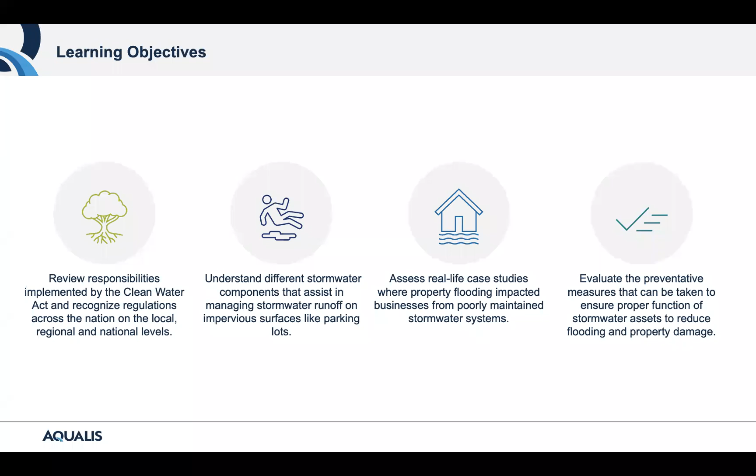And as a reminder, here are our learning objectives for today. Since Amy has already gone through these, let's go ahead and get started. So in our first section, we're going to discuss the foundation for this presentation. Why is stormwater management so important?

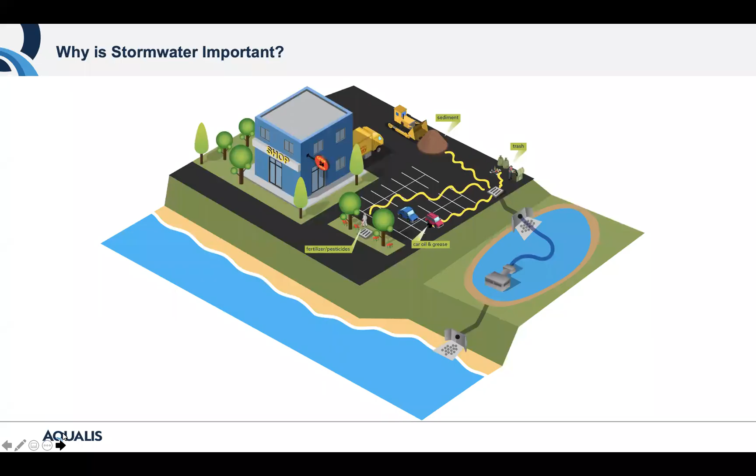When we look at this illustration, we can see the contaminants and pollution that is picked up from stormwater runoff. And when it rains or snow melts, that water is moved through impervious surfaces, which are hard surfaces that don't allow water to seep into the ground. So these are surfaces like parking lots and roadways, especially in urban development. So maintaining and managing stormwater runoff is an extreme concern due to the high surface area of developed infrastructure. And that includes materials like concrete and asphalt.

With more impervious surface, that means larger amounts of runoff that must be directed to a source to eventually flow back into the local watersheds. So all that water, or what we call stormwater runoff, is funneled through to stormwater assets to impact water quality and water quantity. And without these systems, sediment, trash, pesticides, car oil is all deposited into stormwater runoff. And that's then directed down into these stormwater assets and then slowly filtered out into local lakes and rivers, oceans, bays, any body of water.

And communities and ecosystems drink and use this water for recreational purposes. And if these systems are not designed or maintained properly, people, animals, communities can get sick. And these systems protect wetlands and aquatic ecosystems and improve the quality of receiving water bodies, protect the public health, and for our purposes today, also offer flood control.

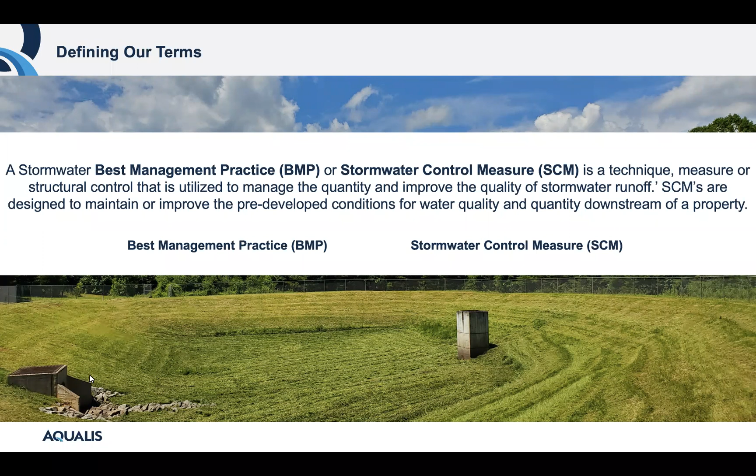In the upcoming slides, we're going to walk through the different types of assets commonly found on retail, commercial, real estate, residential, industrial, educational, healthcare, aviation, you get the point. All these types of properties utilize stormwater assets to mitigate flooding and ensure property safety, which reduces liability and ensures environmental stewardship. We're going to talk more about those requirements and responsibilities in the upcoming slides.

So when addressing stormwater control measures, we're talking about systems like bioretention gardens, or bioretention rain gardens, sand filters, constructed wetlands, wet and dry detention basins, also known as detention ponds, grass swales, permeable pavement, level spreaders, proprietary systems like filters, and all these systems make up engineered best management practices for stormwater control measures. Later we're going to dive further into the common systems that you would find on your property, but next we're going to talk about the Clean Water Act and the national regulations that drive these local and state compliance measures.

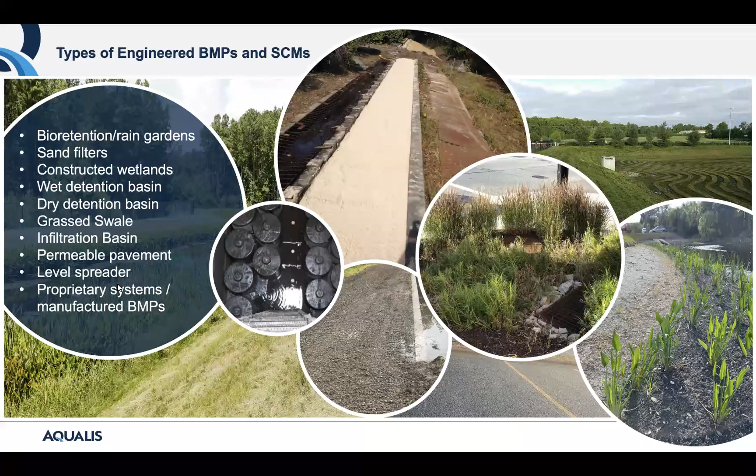So we've talked about the impacts of the Clean Water Act and how the Environmental Protection Agency regulates water, and this is just a brief history of how we got there. The Clean Water Act was initially passed in 1972 after public concern for water quality and safety after the Cuyahoga River burning in 1969, resulting in the Clean Water Act, the Great Lakes Water Quality Agreement, and the creation of the Federal Environmental Protection Agency.

The Clean Water Act serves as the basic criteria by which the EPA regulates discharges of pollutants into the water supply. The Clean Water Act has evolved over the years; before the 2000 Phase 2, the Clean Water Act previously only applied to discharges from sites of 5 acres or more. Phase 2, however, now applies to all construction activities disturbing between 1 and 5 acres.

To reduce the impact of urban runoff, the EPA requires state and municipal agencies to implement, monitor, and enforce resident stormwater management programs. These programs are designed to compel local property owners to maintain properly functioning stormwater systems. Regulations generally apply to residential and commercial properties that occupy a space equal to or greater than that 1 acre, and this includes your roof and parking lot.

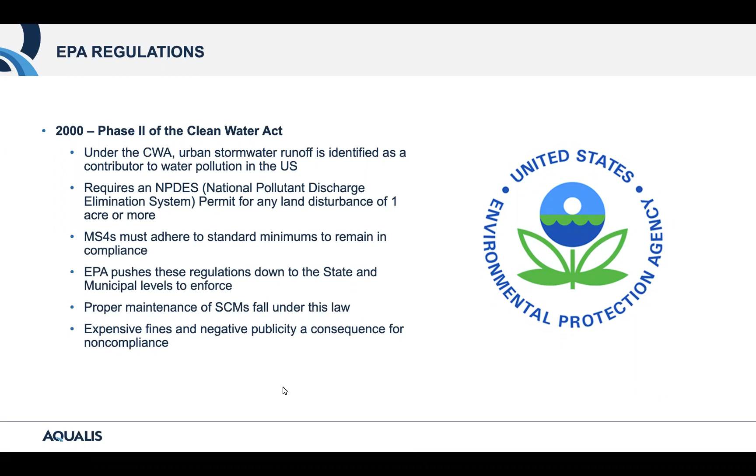Stormwater control measures help to manage water quality and water quantity of post-construction stormwater runoff. Why does water quality matter? When we go back to our original illustration, water fuels our daily lives, from consumption to recreation. We need water to live and thrive and for our ecosystems to thrive. Protecting the quality of stormwater runoff from impervious surfaces protects our future and the next generation's future.

And so what about water quantity? We can't function when our infrastructure is underwater, and systems are designed to handle 100-year storms. These systems are designed to hold and slowly filter the water out to the watershed to mitigate that flooding when properly maintained.

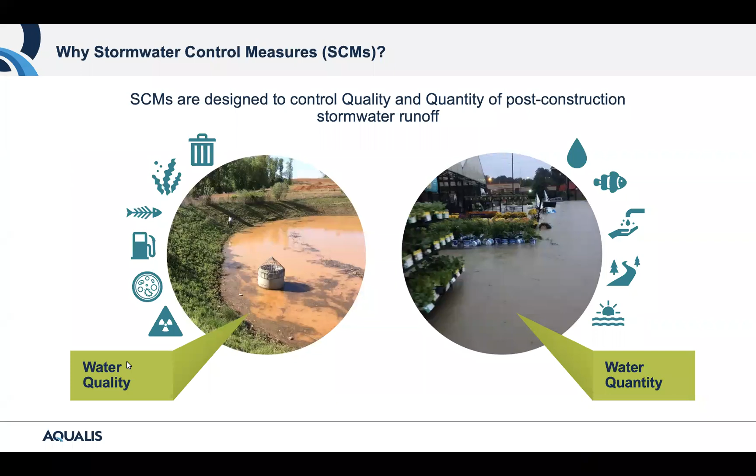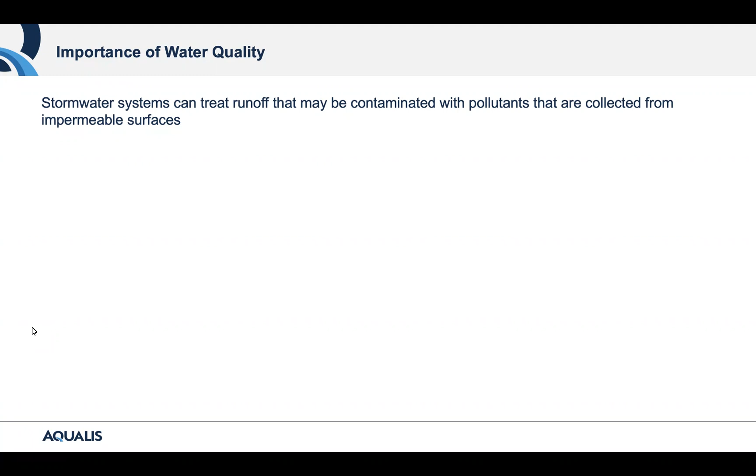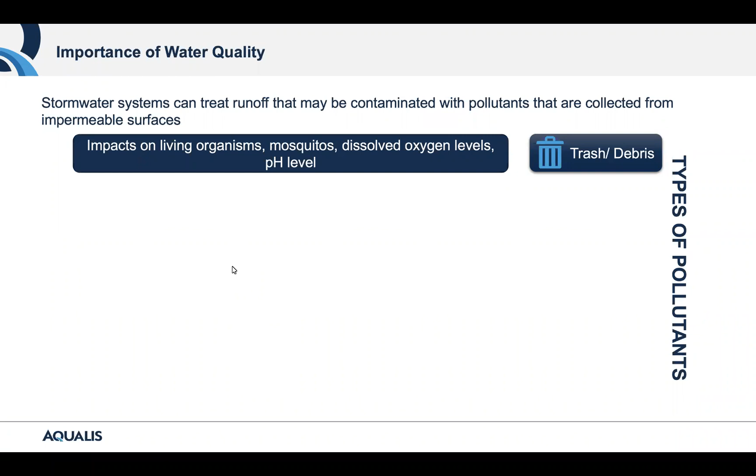So when we talk about water quality, these items greatly impact the pollutants and contaminants in stormwater runoff. Trash and debris negatively impact living organisms and are breeding grounds for mosquitoes, and organic matter decay also reduces oxygen in the water column and can change the pH levels, which negatively impacts living organisms that can be highly sensitive to any pH changes. This also includes gross solids and plant leaf matter. These are all things that we don't want to get into our water system.

Nutrients. Overloading causes excessive weed and algae growth and reduces dissolved oxygen levels in water bodies. Treatment options for algae and weeds are necessary to not only keep the system functioning as designed, but also to keep the water quality at an acceptable level. Phosphorus is commonly found in agricultural fertilizers and manure and is important to plant life, but too much in water can also lead to a reduction in dissolved oxygen in rivers and lakes.

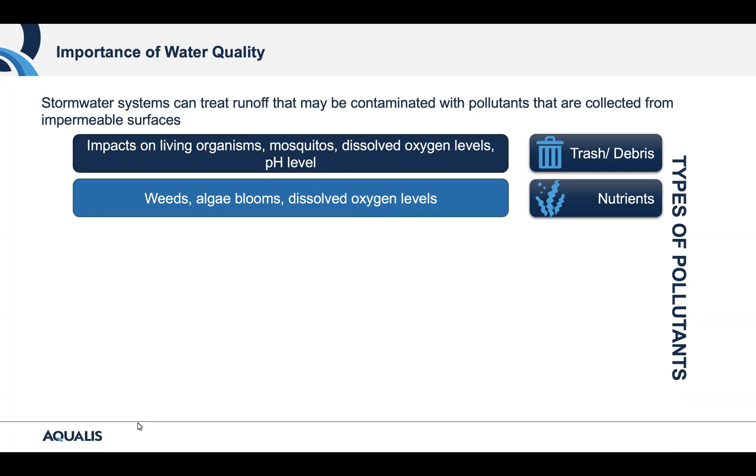And sediment. So this carries nutrients, clogs gills of fish, can suffocate stream bed organisms. It limits aquatic food supply by preventing sunlight, which then limits plant growth, and it heats the water, which decreases dissolved oxygen levels even more.

Heavy metals, so this can poison or damage processes of living organisms, and they exist in the environment for a really long time. This is motor oil, fuel, this is from vehicle wear, use and human activity. When we're thinking of a parking lot, when it rains, that runoff collects those oils and heavy metals and deposits that right into the stormwater assets, eventually reaching the local watershed.

Bacteria, so this can cause illness, comes from animal waste and sewage, all things we obviously do not want to reach our water system. Chemicals, so this is toxic to our living organisms. This includes pesticides or herbicides, sewage, paint, detergents, parking lots, loading docks, retail locations. These are common items that we find on the property.

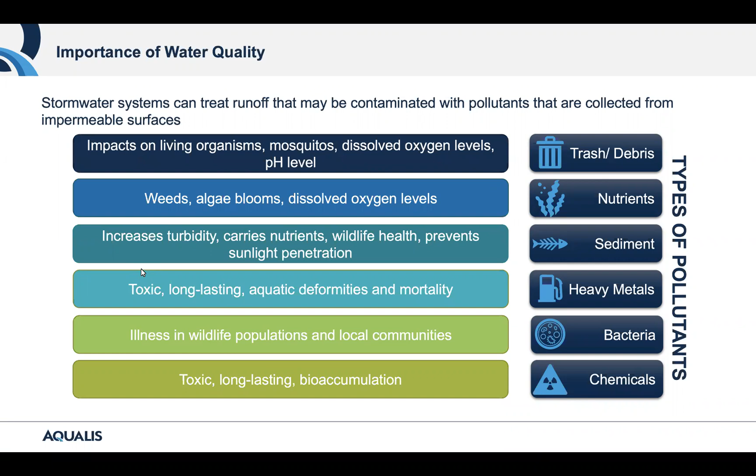We had an instance where a detention pond was very white and murky, and come to find out that there was painting occurring on the property. When it rained recently, that paint all washed into the pond. So these are all things we want to try to control when we're talking about SCMs.

So now we're talking about water quantity, and for today's purpose, really our main focus. We think of water quantity, we think of flooding, but what contributes to that flooding? It's more than just heavy rain events and localized flooding. Impacts really do span much greater than that.

So flood prevention, our main objective for today. Stormwater assets help to mitigate flooding in parking lots, private and public property, including roadways. This flooding impacts the quality of the water as well, as we just mentioned in that last slide. And when systems flood, they don't function as designed, increasing the risk of contaminated water as the system isn't slowing or filtrating and treating the water.

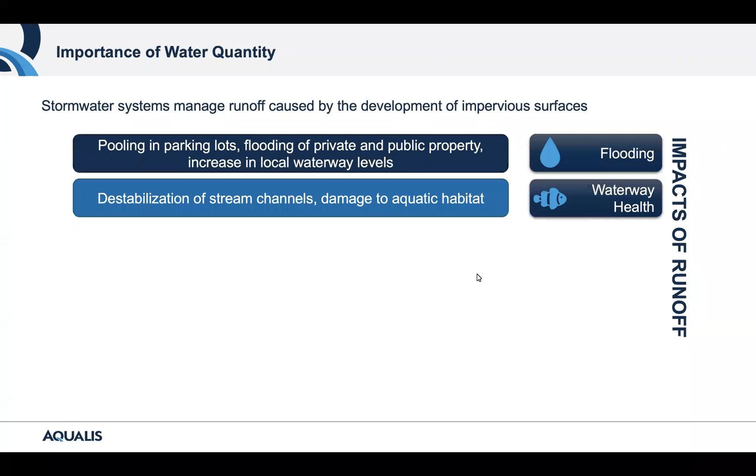Waterway health. So flooding impacts waterway health with destabilization of stream channels, damages to aquatic habitats, groundwater reduction. This prevents groundwater recharge, which is the natural infiltration of water into soils, slowly moving the water down into the water table, removing those pollutants. Large amounts of water that regions are not designed for move across the surface more quickly, reducing that chance for groundwater recharge, which helps remove those pollutants as it moves through the soil.

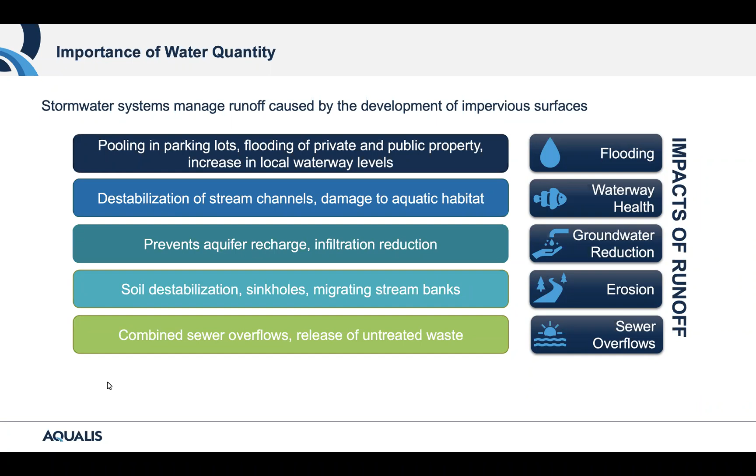Erosion, so this is flooding which leads to sinkholes, soil destabilization, which can lead to major public safety risks and also can impact stream banks. Sewer overflows, a common occurrence during flooding when backup pumps or systems fail to handle the amount of water, leading to untreated wastewater reaching local rivers and lakes that can make people and organisms sick.

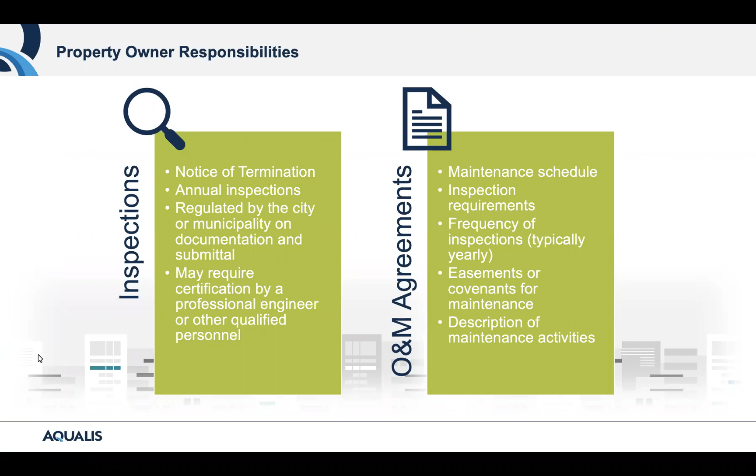Your O&M agreement is really your greatest tool in ensuring you are meeting compliance standards. This takes any mystery out of understanding what your responsibilities are for your stormwater assets. Depending on the age of your system, this can be found on file with your local municipality, or you can work with a stormwater management team to help facilitate that document and come up with a management plan that works best for you, your budget needs, and your system needs.

Notices of violation are an official notification to inform a non-compliant property owner or manager of a violation in relation to stormwater management. When inspections or O&M agreements are not being followed, a notice of violation can be issued. It's a very detailed document that includes where the deficiency was detected, and when and how it should be fixed. This may include fines and penalties, which are outlined in the NOV documentation, and typically a deadline is enforced.

And if no action or communication with the regulatory body occurs, you could be facing daily fines of hundreds of thousands of dollars each day until there's a remedy.

Most importantly, in every facet of life, ignorance of environmental laws is not an excuse for non-compliance. So even if you are unaware of your responsibility, it is necessary to take action if you receive a notice of violation. It's important to take the steps we're providing to you today to ensure that you avoid any costly fines in the future, or know how to act if you get a notice of violation.

It's worthy to note that regulatory bodies don't want to issue fines. Their responsibility is to uphold environmental standards, and they want to work with property owners in maintaining their systems to avoid fines at all costs. It's essential to respond and work with the regulatory body to let them know you have a plan in place. We manage all communications and approvals with municipalities to ensure compliance and to hopefully reduce fines. In many cases, as long as that communication is open and a plan is in place before the deadline, municipalities are willing to work with property owners and come together to make the community better.

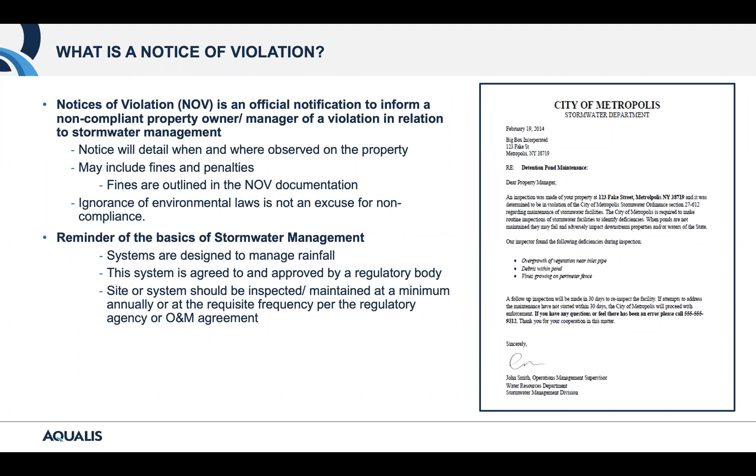So just a brief reminder of the basics of stormwater management: these systems are designed to manage rainfall. They're agreed upon and approved by a regulatory body, and they should be inspected or maintained at a minimum annually, or per that O&M agreement, like we talked about in the last slide.

So what leads to notices of violations? There are many factors and incidences that can warrant a notice of violation being issued. During construction, there are their own sets of standards, since the impacts to water quality and quantity are much different than with post-construction. This includes failure to apply for NPDES permit coverage, failure to prepare and implement a stormwater pollution prevention plan, which we refer to as a SWPPP, inadequate SWPPP or BMPs, or exceedance of permit effluent limits.

After construction, what we as an organization focus on, and our focus for today, is post-construction violations. This includes failure to implement appropriate stormwater control measures, and failure to maintain or repair SCMs. This is a big one, especially with an established O&M agreement on file that literally lays out your responsibilities. This can especially be brought to the attention of the municipality when water is pooling or flooding in your parking lot or property, so it's an easy way to identify that a system hasn't been maintained.

The failure to conduct or document inspections - many times annual inspections are required at a minimum and kept on file with that regulatory body. Illegal dumping and discharge, and illicit connection, such as connecting a sanitary sewage system into a stormwater system.

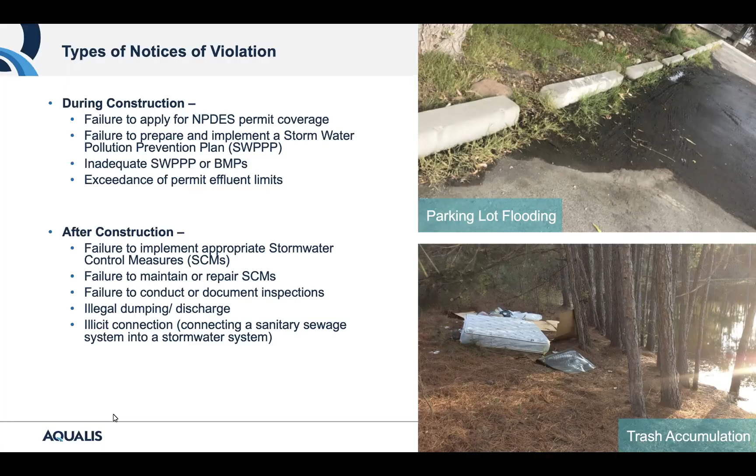So we understand the responsibilities. Let's talk about how we can mitigate flooding utilizing SCMs and what preventive maintenance protocols should be applied, and what deficiencies can end up causing flooding by each type of common SCM that you can find on a property or in a parking lot.

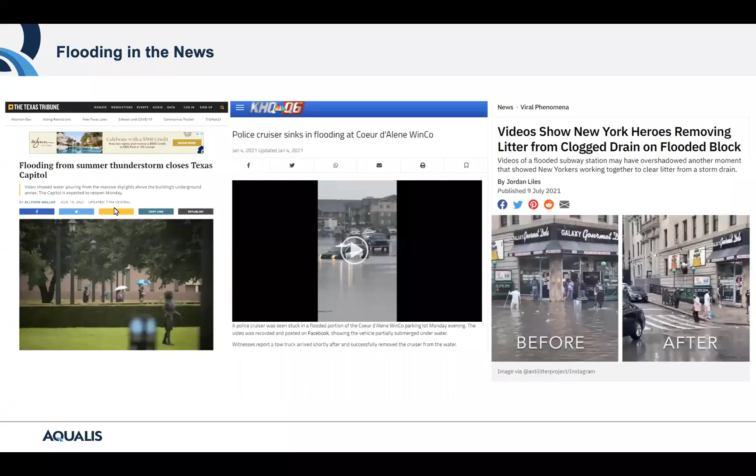So I want to highlight briefly the relevant news articles about flooding due to stormwater assets. We typically see flooding associated with these hurricanes and strong rain events, but it's important to remember that there usually is a source for why that flooding or backup occurred.

Take the flooding at the state capitol in Texas. This was due to a single clogged storm pipe causing nearly an inch of water in the wings of the capitol, shutting down the capitol for a few days.

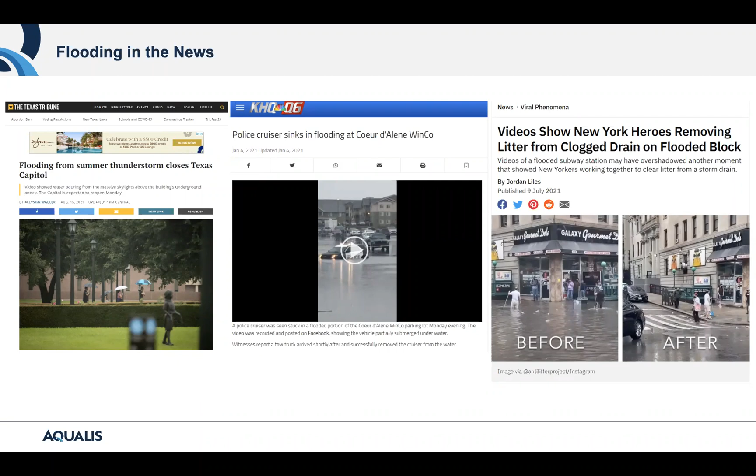The middle shows a police cruiser sinking into flooded waters at a grocery store that has a history of flooding. And the last headline is from Tropical Storm Elsa this past summer, showing a before and after of where a clogged drain caused water to pool and back up on the streets of New York due to trash.

So solutions are simple, and there's always a root cause coming back to that flooding.

Let's break down the anatomy of a parking lot when looking at the most common assets on a typical commercial or retail property. Bioswales are typically located on the border of a street or impervious surface like a parking lot. These systems are vegetated swales, aesthetically pleasing, made of layers of soil, mulch, and gravel, and can manage large amounts of runoff and slowly infiltrate it into the soil.

When larger rain events occur, a drain is designed there to carry that water through to an underground pipe that feeds out into another treatment system.

Catch basins, a very common facet of any parking lot, collect runoff to then distribute down into an underground system to feed back into the waterway.

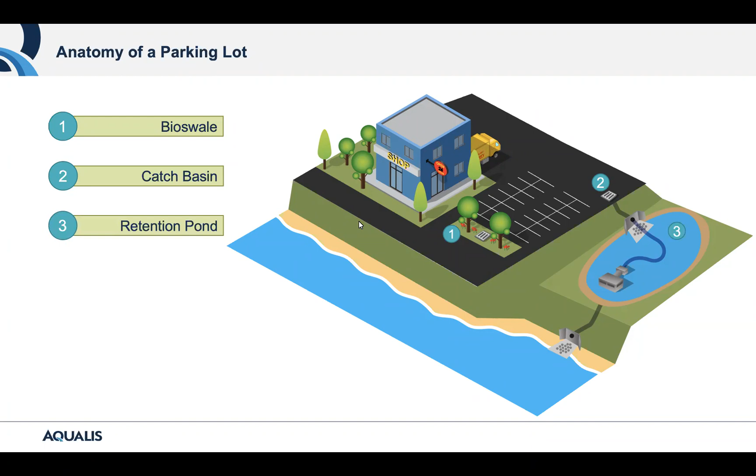Retention pond: an SCM that collects and retains water that is filtered from the bioswale, catch basin, or from loading docks.

Loading docks. This is an area particular to flooding, and we're going to talk about the systems that are commonly found on this part of a property.

Permeable pavement: this is concrete pavers or asphalt that's designed to infiltrate the water to absorb that runoff. Many of these systems work in harmony together to ensure the proper mitigation of water quantity and, of course, water quality.

If you have a backup or a clog at the inlet, the part of the illustration coming down off the parking lot, or the outlet where the water is feeding out to the community water source like a lake, river, or bay, the water will back up to the catch basin, back into the permeable pavement, into the loading dock. So understanding how that system works together can help in an emergency situation to find that root cause.

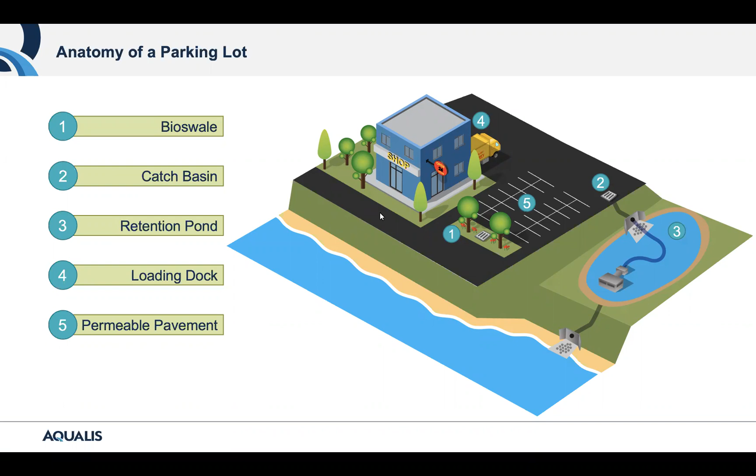Catch basins are a common solution in stormwater assets, designed to collect stormwater runoff from non-permeable surfaces, and are very effective stormwater solutions. These come in a few different designs, including drop inlets, that second photo from the bottom left; curb inlets, the middle photo; and a catch basin, the second photo from the right.

These systems take the flow of water underground through pipes, eventually to a pond or watershed. Sediment is settled to the bottom of the catch basin and is not typically meant to reach the drainage system; however, it's not designed to properly promote sediment settling as other stormwater assets like ponds are designed to.

However, as sediment and trash become accumulated, this can further cause backups and flooding to the system. These are usually found in parking lots and roadways, and normal wear and tear is expected, as these systems are the first line of stormwater defense in parking lots.

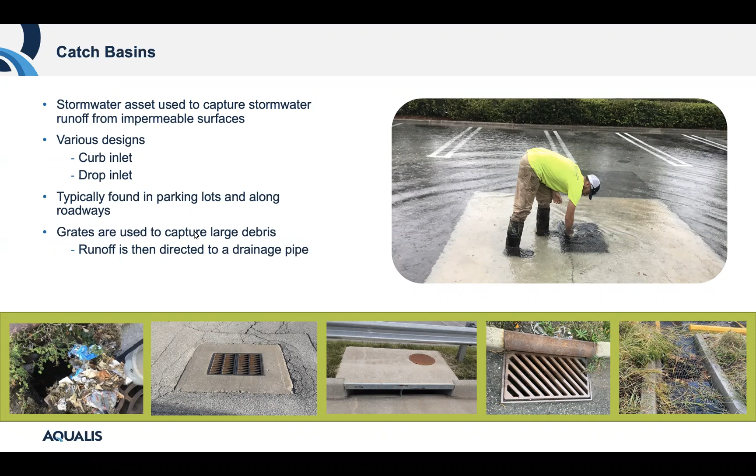So why do catch basins fail? Common deficiencies we see with catch basins include brick and mortar deterioration, found in or around the mortar of the basin. With proper management teams, we can monitor over time if deterioration requires any kind of intervention.

Sinkholes occur when water infiltrates outside of the basin through the deterioration of the mortar, causing water to pool outside and eventually cause a concave that appears above ground. These are very dangerous and need to be addressed immediately.

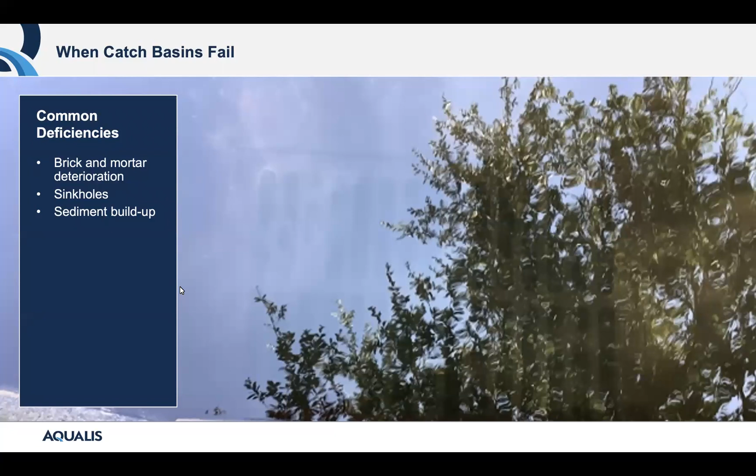Sediment buildup, sediment can collect at the bottom of the catch basin, causing further blockage and backups, ground separation and cracking around the catch basin. Specifically, we're talking deficiencies that can lead to flooding.

With catch basins in the name, they're designed to catch debris and trash, but if not regularly maintained or cleared, the catch basin will back up, or that debris will continue through the system to cause further blockages. There's nothing worse than flooding caused by trash accumulation, which is such a simple and effective preventative maintenance treatment.

Blockage further in the drain system. So looking back at our illustration, if there's a blockage, crack, or issue with the underground pipe, that water could flood back up into that catch basin.

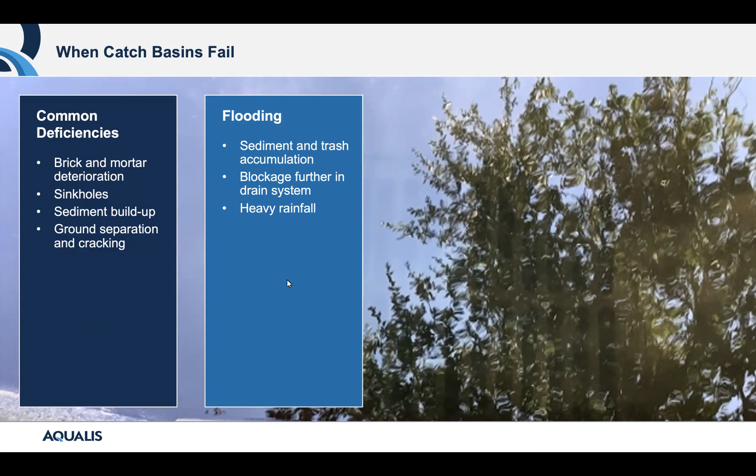Heavy rainfall, simply an overwhelming amount of rain can cause pooling, but if water's not drawn down quickly, that's when you know you have an issue. So looking into preventative maintenance steps before a heavy rainstorm can assist in assuring proper flood management.

Preventative maintenance: visual inspections, looking at the brick and mortar for deficiencies like sinkholes and completing annual inspections. Sediment measurement, using a tool dropped into the water to measure the sediment level over time, to evaluate if there's any further corrective maintenance needed.

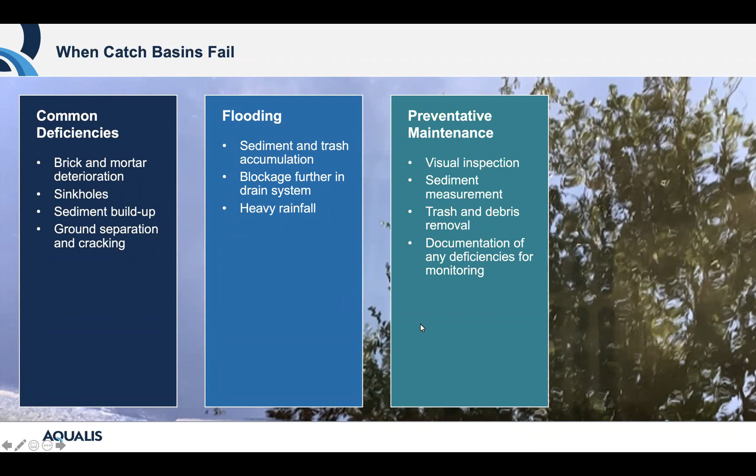Trash and debris removal, simply removing and fishing out those floatables to make sure they don't further clog the system, on a regular basis or when there is a heavy rain event approaching. Documentation of any deficiencies for monitoring, keeping a record of repairs and maintenance, especially if applicable to your O&M agreement.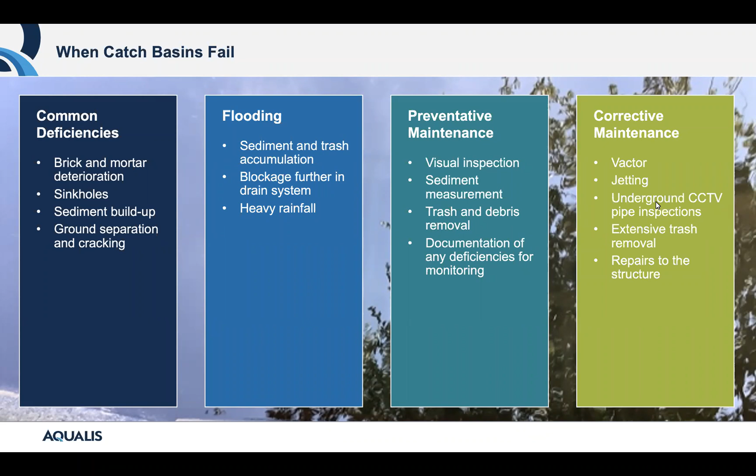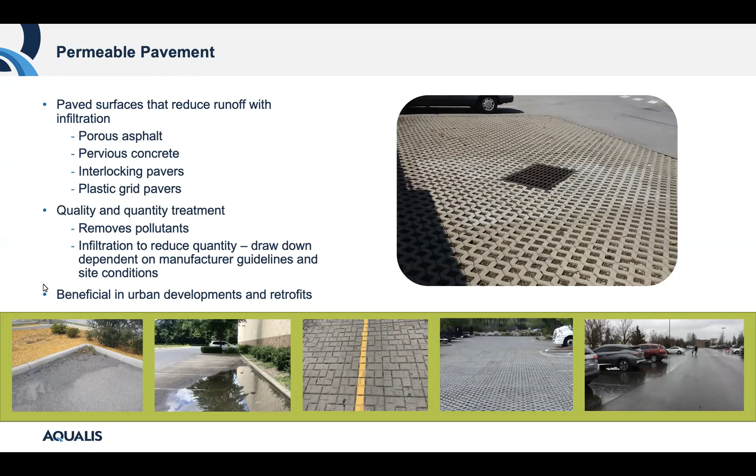But what happens when they fail? Common deficiencies include aggregate material clogging. When sediment settles into the material, this can cause a crusting that leads to flooding and inadequate infiltration, which could cause pooling in specific areas.

Plow or vehicle damage is common to these systems; blades from snow plows can damage the assets. So protective blades are needed on snow plows when cleaning these areas during winter weather.

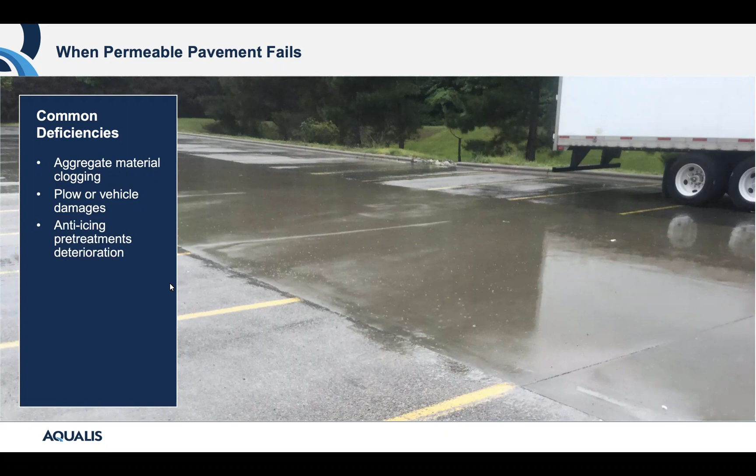Anti-icing pre-treatment deterioration: salt should never be used on permeable pavement, as this erodes the aggregate material and can also add to sediment collection.

Flooding from sediment accumulation: settling into the joints of the pavers will cause backups and flooding when proper preventive maintenance is not followed. Clogging from winter sanding can also occur, as that de-icing sediment can clog the system, block infiltration, and then the water will pool above.

Permeable pavement is not designed as an overflow from other SCMs to help infiltration. Heavy rainfall is a common factor through all of our SCMs, and with heavy rainfall and inadequate preventive maintenance, flooding is bound to happen.

Preventive maintenance includes visual inspection, which can typically be done on a routine basis to ensure that if there is aggregate material, it's still plentiful. Percolation testing is done by testing portions of the pavement and timing that drawdown, depending on the manufacturer. The timing really indicates if there's an issue.

Spot aggregate material replacement and routine industrial vacuuming uses high power vacuum to remove buildup of sediment. Maintenance documentation and recording is especially important to continue, especially if there's a warranty that includes preventive maintenance. These different assets will include a full detail of what preventative maintenance is needed for these systems.

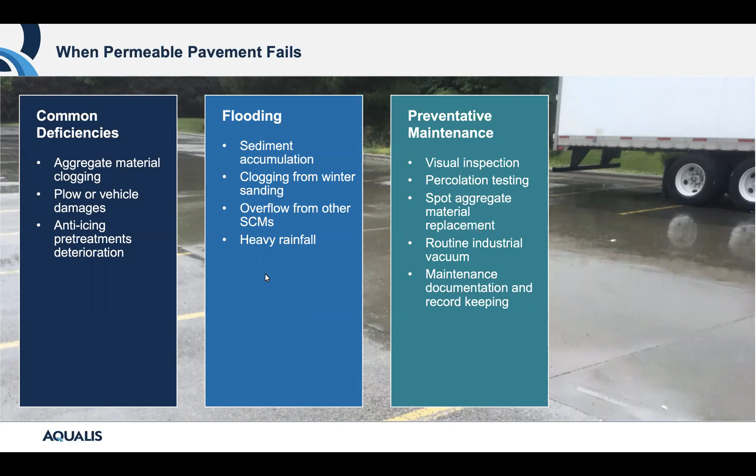Corrective maintenance is oftentimes needed to get the system back to its original function. This includes a deep cleaning with an industrial vacuum, aggregate material replacement on a large scale, and then paver replacement if damaged as well.

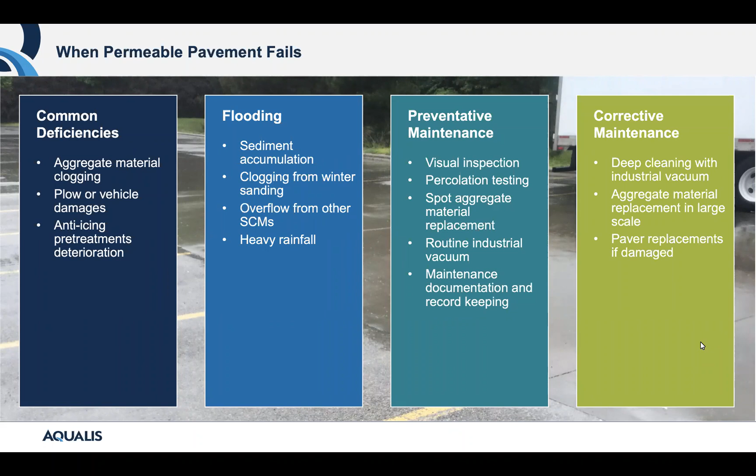A full-scale replacement is needed when the system has been neglected and corrective maintenance will not get the system back to functionality.

Retention and detention ponds are another common form of SCMs that you see on many types of properties. These systems are highly successful in treatment of water quality and quantity. Retention ponds are designed to always hold a permanent volume of water, and detention ponds are designed to hold a temporary volume of water during and immediately after rain events. Retention and detention ponds are typically found in urban and residential areas with large amounts of impervious surfaces, such as shopping centers, apartment complexes, parks, and other large paved areas.

Stormwater ponds are designed to accept and store stormwater during high water events. This increases the overall flood storage of a system and reduces damages caused by flooding by retaining stormwater long enough to reduce the peak flow downstream.

Water is diverted to a wet retention pond by a network of underground pipes connecting storm drains to the pond. The pond's natural processes then work to remove pollutants. The system allows large amounts of water to enter the pond, and the outlet then empties those controlled amounts of water to a downstream water body. Through our maintenance programs, we monitor, provide inspections, and alert property owners to any deficiencies that impact these ponds.

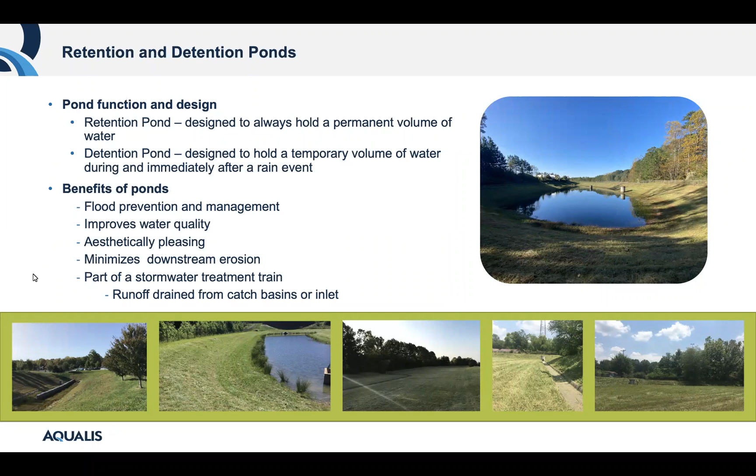Common deficiencies found in stormwater ponds include vegetation overgrowth. This is a very common sign of neglect of the system, hindering the pond from functionality, impacting slope through root systems, encouraging mosquito habitats, and is ultimately unsafe for passersby as sight lines are impacted. It's a common note for notices of violations.

Nuisance vegetation can quickly take over, impacting the natural infiltration and pollutant removal. Sinkholes are common when underground piping leading to the pond is damaged, causing that concave above the surface, revealing the sinkhole. It's so important to have these addressed immediately, as sinkholes are extremely dangerous.

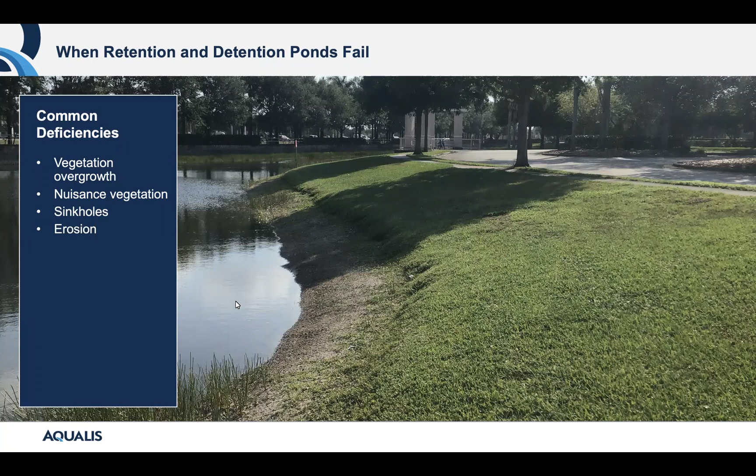Erosion can occur if water bypasses the system or the parking lot is overflowing, when water is displaced and moving over a slope rapidly. Flooding can also occur due to sediment accumulation.

In addition to mitigating flooding, another important function of stormwater ponds is to capture and trap debris and sediment. When sediment gets too high, it can impact the quality of the water and cause blockages to the outlet. Trash accumulation is also common, so some ponds even include trash racks to further decrease the accumulation of trash, collecting it at the inlet and near the outlet to help decrease trash that can clog or reach local waterways, which is really important to help prevent flooding.

Debris or clogs in the outlet structure, with trash and sediment as contributing factors. Failure to maintain structures occurs when ponds are neglected, causing water levels to rise past the design levels, which can result in notices of violation and flooding. Collapsed pipes in the underground structures feeding into the ponds can cause backups, whether in the pond or back into the treatment train, such as the catch basin or bioswale.

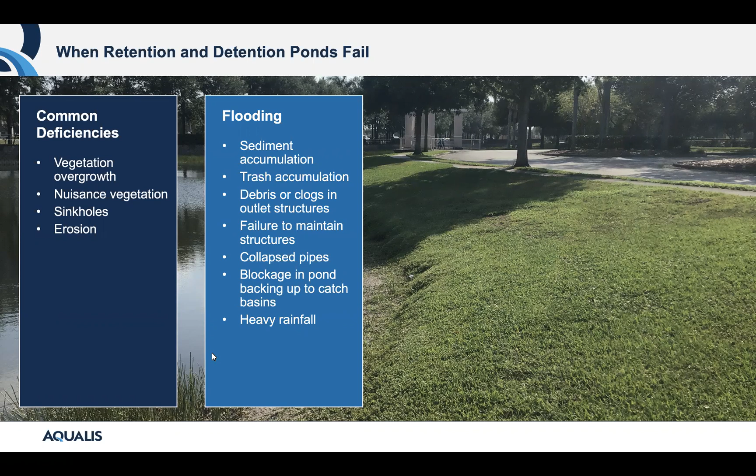Heavy rainfall can cause drawdown to not occur at the rate it's supposed to, so it's important to watch that drawdown, especially after big rain events.

Preventative maintenance includes vegetation management. We just talked about how that vegetation can get out of hand quickly, so routine mowing, trimming, and removal of nuisance vegetation is really important here.

Monitoring sediment in the forebay or basin, removing trash and debris, monitoring water levels after rainstorms for proper drainage, and assessing animal activity. Beavers really love to make homes in these ponds, and they create dams that can cause flooding and backups, prohibiting the function of the pond's design.

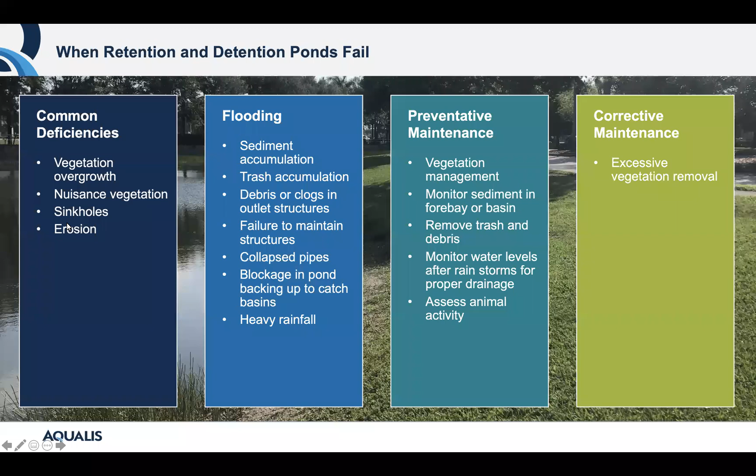Corrective maintenance includes excessive vegetation removal, slope stability work to reduce or repair erosion, and addressing clogged or damaged pipes. Sometimes extensive repairs are needed if major excavation is required. CCTV underground inspections are a cost-efficient way to find root causes and treat the issue at the source.

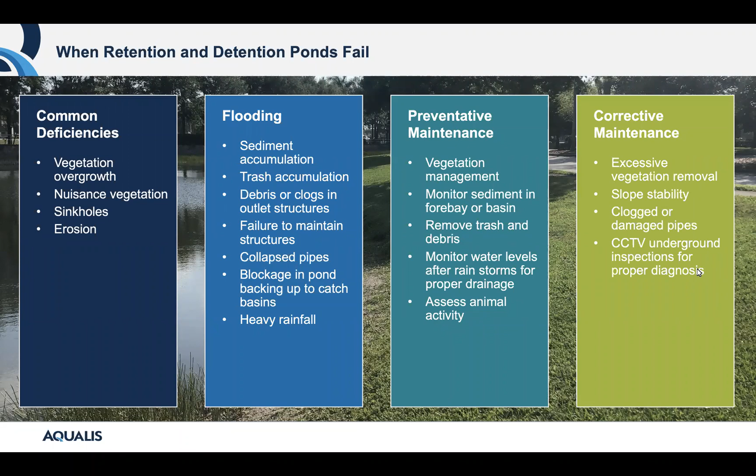Swales and bioswales: bioswales and grass swales are SCMs full of vegetation or grass that border impervious surfaces. As you can see in these pictures, they're almost always located near parking lots, and they utilize infiltration to reduce flooding and collect pollutants. Like rain gardens, these systems consist of layers of materials to help water infiltrate into the soils, and with peak water levels, divert into an underground pipe.

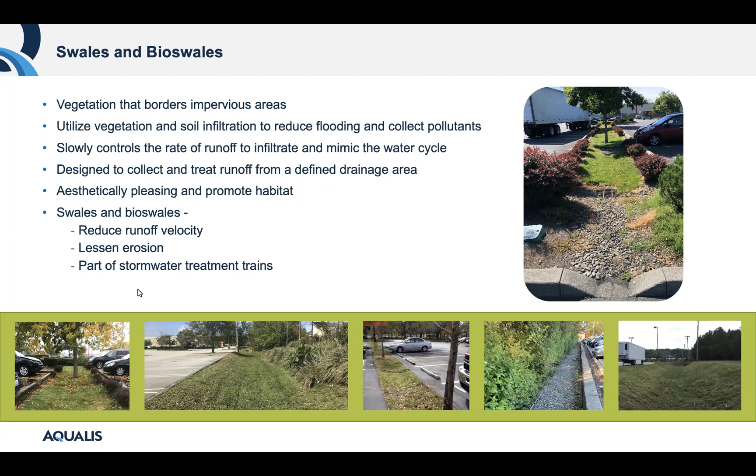These systems are linear in nature and function as an open channel to convey stormwater runoff. They're designed to mitigate a portion of stormwater runoff and are a very aesthetically pleasing addition to roadways and parking lots. They also assist in reducing runoff velocity to capture large particles and pollutants during rain events, and help lessen erosion in the areas they're designed for. They're typically part of a stormwater treatment train, as they are one of multiple SCM systems on a property.

What happens when they fail? Common deficiencies include vegetation overgrowth—you'll see it over and over again—to the point where the vegetation is too overgrown to properly manage stormwater as designed. Nuisance vegetation, like with stormwater ponds, can grow in thick patches here too, hindering water from flowing freely or as designed. Erosion can occur if water isn't directed or the system isn't maintained as designed, bypassing through an area that's not part of the stormwater asset.

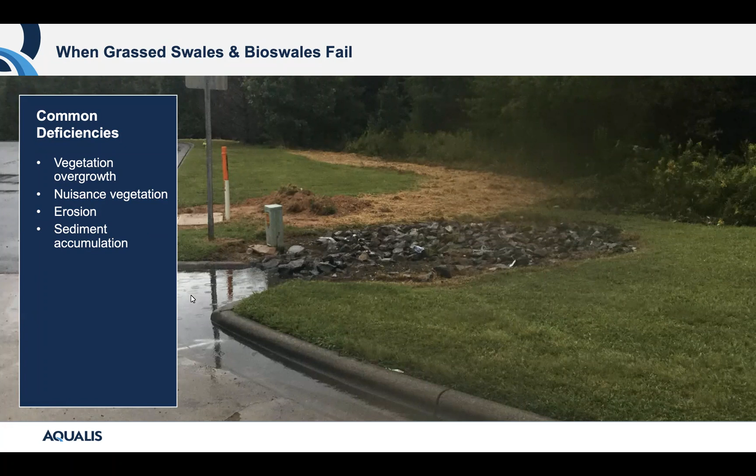Sediment accumulation builds up in the system over time, impeding infiltration and eventually causing a slow drawdown and flooding of the bioswale. Flooding often traces back to improper maintenance. Trash and sediment accumulation, if not properly maintained, can build up and hinder runoff from ever reaching the soil it's meant to infiltrate.

These systems are designed with layers of compact soil, loose mulch, and gravel, all of which must be maintained to function properly as designed. If the vegetation fails or dies, it no longer assists in reducing velocity, ultimately overwhelming the swale and causing flooding, as well as providing no pollutant uptake.

Backups from the SCM treatment train occur since these systems capture some runoff on properties—when other SCMs fail, it can overwhelm the bioswale. Heavy rainfall, continuous rain, and high velocity can all contribute to flooding if the swale isn't properly maintained. Swales and bioswales will slowly degrade naturally due to their design, as water at high velocity drains, causing vegetation and soil to deteriorate and decreasing infiltration effectiveness. Extreme rain or flooding can exacerbate soil degradation and vegetation failure, which then increases flooding. Clogging results from that sediment and debris.

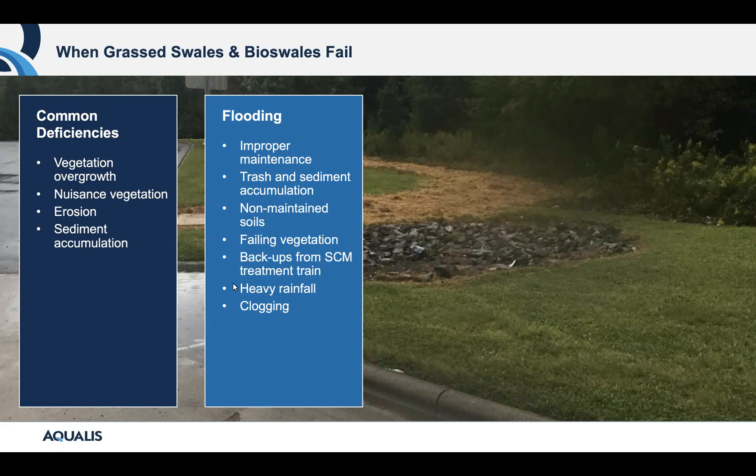Preventive maintenance: vegetation management is so important here. Reseeding or replanting is needed to encourage proper growth and avoid vegetation failure. Soil inspection ensures proper compaction and infiltration testing. Monitor water levels after rainstorms—especially for newly constructed systems, analyzing these systems during or just after a rainstorm is really important to make sure they're functioning as designed.

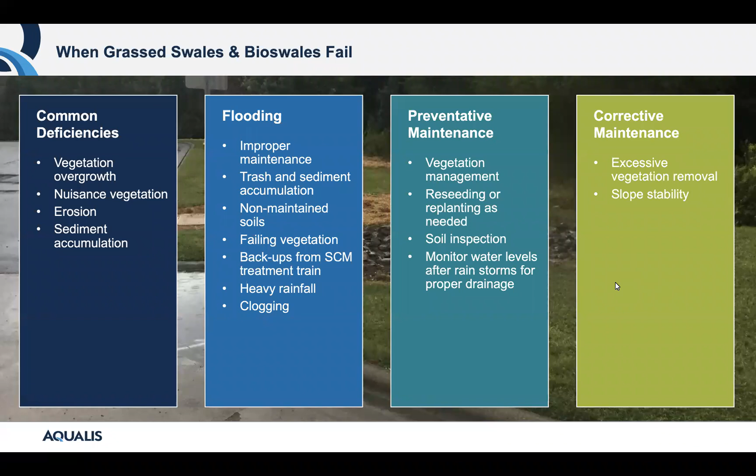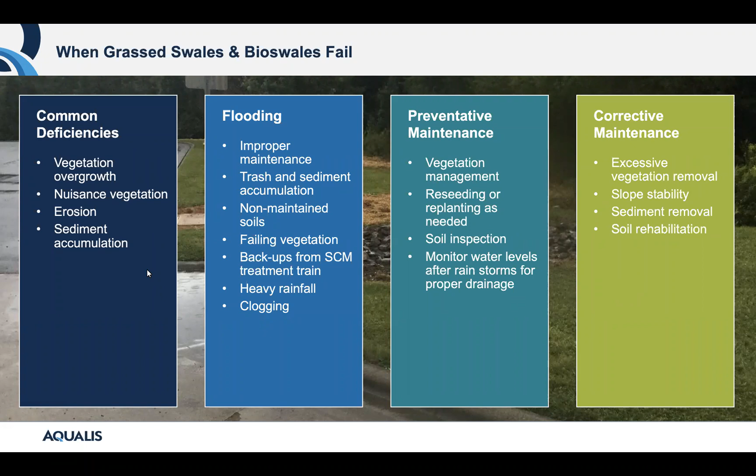Corrective maintenance includes excessive vegetation removal and slope stability work—if there's slope failure, this impacts the velocity at which runoff reaches the system, causing additional sediment to infiltrate and leading to early failure. Sediment removal: heavy sediment is visual and suspected, and can be excavated from the system and disposed of. Soil rehabilitation may require a full rehabilitation to restore the soils to their original design and regain infiltration and removal capacity.

So underground systems. Engineered underground SCMs offer flood control, reduced erosion, and groundwater recharge. By slowly moving stormwater runoff from areas with densely impervious surfaces, this solution can slowly reintroduce water to the watershed. Large pipe systems help slow down and hold stormwater runoff, commonly paired with proprietary devices so that water quality can also be treated.

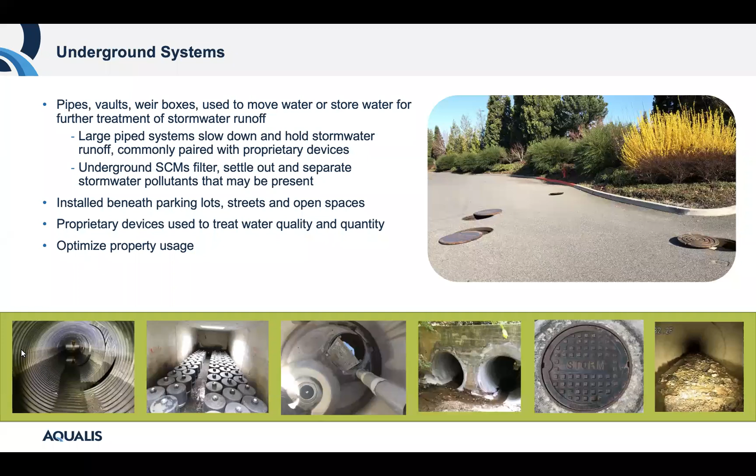Underground assets assist in the removal of hydrocarbons, phosphorus, and other heavy metals when coupled with proprietary devices. These are typically installed in parking lots, streets, and open spaces, and provide additional public safety as well. Proprietary devices are used in conjunction with underground SCMs in the form of filters or cartridges to further remove pollutants through different kinds of systems. And underground systems maximize the space below ground to minimize the impacts to land above ground.

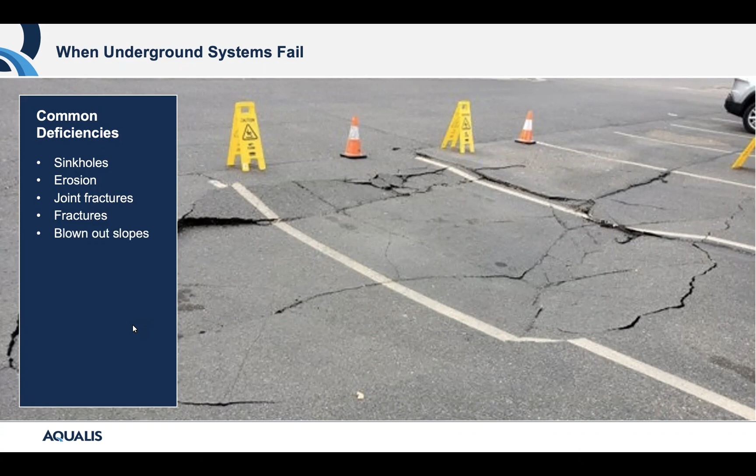When we're looking at flooding, this includes, again, improper maintenance, including failures to complete visual or annual inspections. Clogged drains: debris, trash, and sediment all settle and clog these systems, which then back up into catch basins and onto your property. Water bypass, when that water detours from the design. Damaged pipes, so similar to the above, water's not reaching or moving through its intended path, backing up to cause above ground flooding. Sediment accumulation, trash and debris blockages, all leading to flooding.

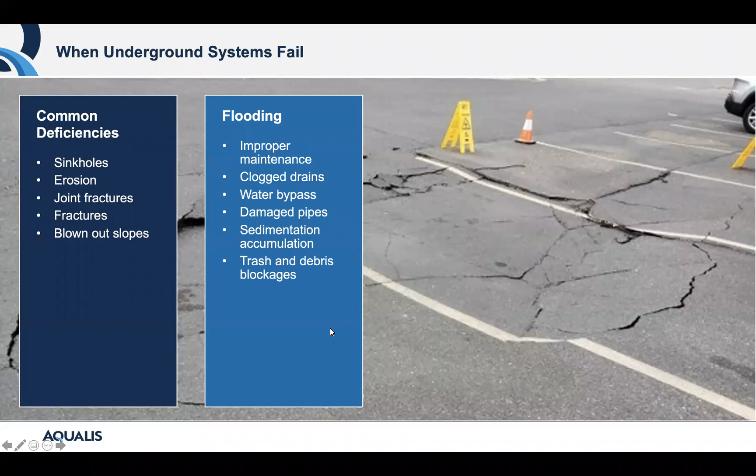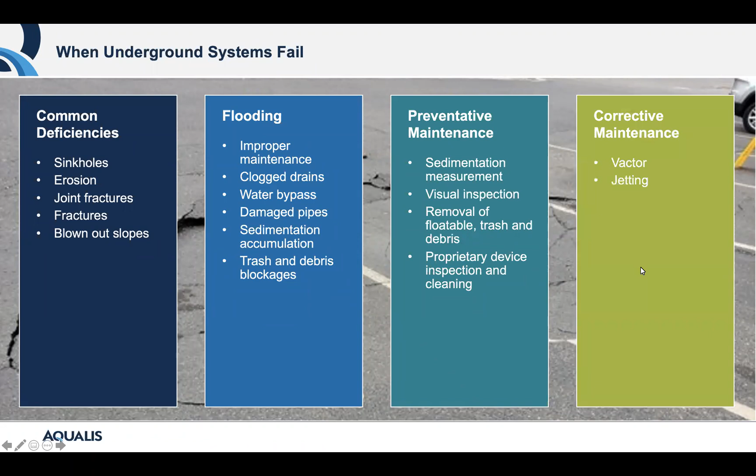So preventive maintenance, what can you do to mitigate that flooding? Sediment measurements, using a proprietary measuring tool to monitor sediment over time in the system, visual inspections, removal of floatable trash and debris, proprietary device inspection and cleaning, and corrective maintenance. So vactor, jetting, CCTV underground pipe inspections, proprietary filter replacements. These can all vary in types, sizes, and quantities as well, so working with a stormwater management team that understands those filters is really important.

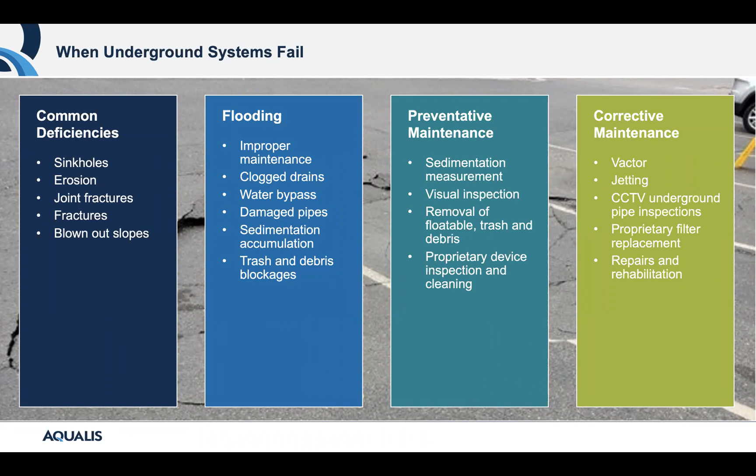Repairs and rehabilitation. Repairs to underground systems are usually costly and extensive. With aging infrastructure, many systems installed 30 years ago are now reaching the end of their life cycle. So utilizing CCTV underground inspections can assist in evaluating the health of the system in order to budget appropriately for repairs and replacement.

Sump pumps are also located in this area to help move water where gravity is unable to move it down through the underground system. These pumps can fail due to lack of maintenance and neglect, causing further flooding. And catch basins are used in this area to move the water to underground systems by catching debris and trash. These systems, purely due to the location, are under constant wear and tear from debris like broken pieces of pallets, spilled materials, and trash.

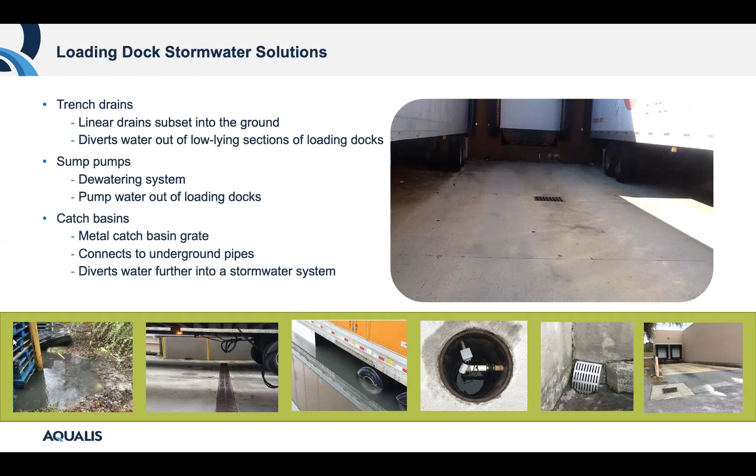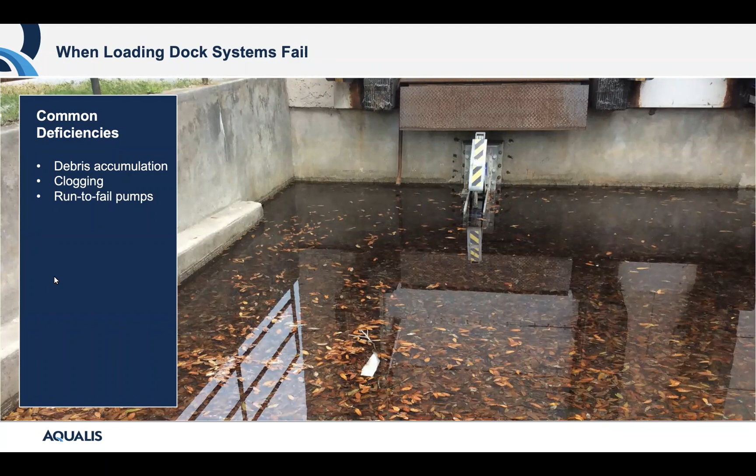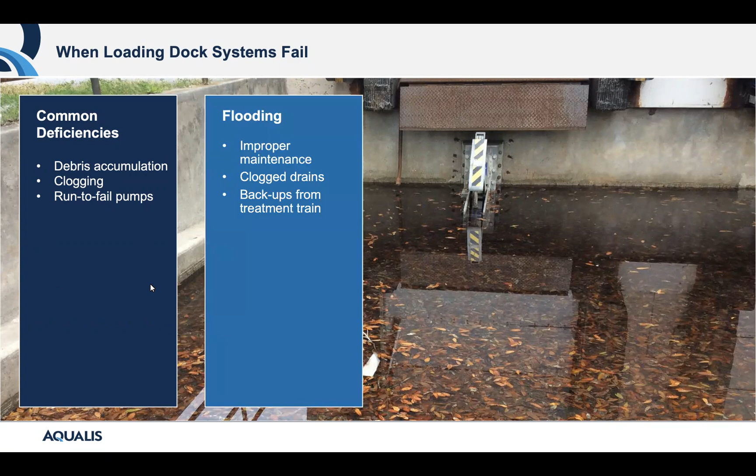When loading docks fail, this includes debris accumulation and clogging: sediment buildup and trash can clog the pump, the trench drains, and catch basins. Run-to-fail pumps, which is very common with pumps. Flooding, from improper maintenance or neglect of the system. These areas require frequent visits to ensure systems are functioning as designed, especially in locations that rely on deliveries. Clogged drains, backups from that treatment train that we talked about, debris and trash buildup.

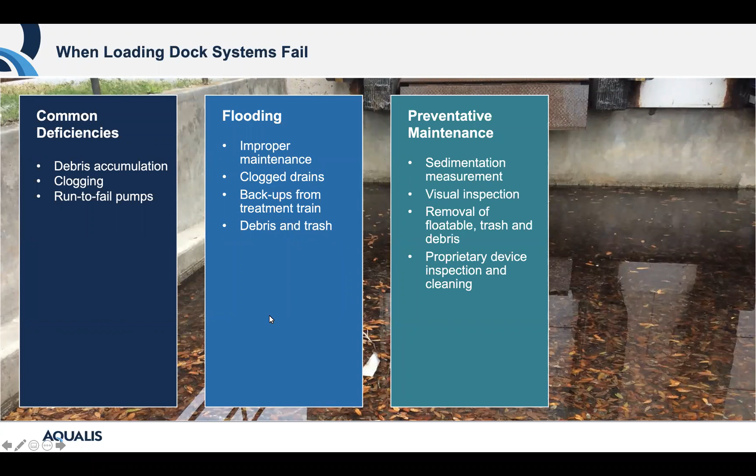So preventive maintenance. This is sedimentation measurements, visual inspections, especially during rain events, ensuring that the water is moving where it needs to be and that drawdown is happening correctly as well. Removal of floatable trash and debris, proprietary device inspection and cleaning, corrective maintenance. So we're looking at vactor, jetting, CCTV underground pipe inspections, filter replacements, and repairs and rehabilitation. This includes pumps as well. Full replacement of pumps may be required if they are not maintained and require frequent emergency visits.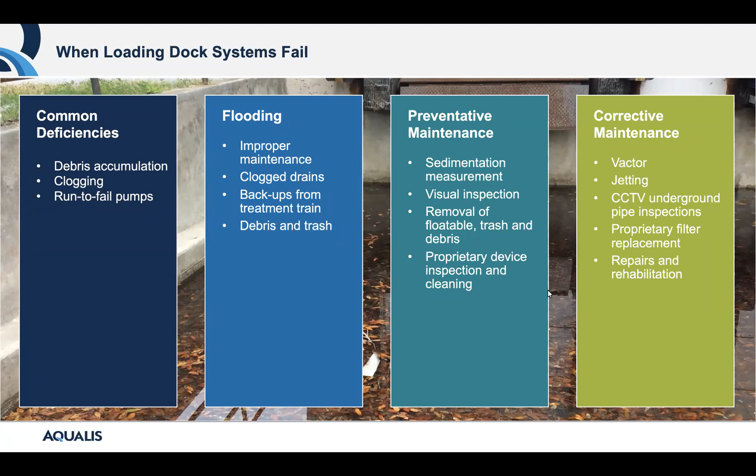The run to fail method. So I mentioned this briefly. Run to fail is a common practice with these systems. So they're typically tucked behind buildings, hidden parking lots, vegetated. So if you're unaware of what a bioswale is, you would think it was there to be designed as an aesthetic part of a parking lot. It's actually a system that requires maintenance.

So we find that this is due to lack of awareness of these systems, poorly maintained due to turnover in positions, unaware of property use O&M agreements, deficient knowledge of regulations. Sometimes there's budgetary restrictions, can be typical, especially with systems that require extensive restorations. Lacking proper budget allocation to maintenance.

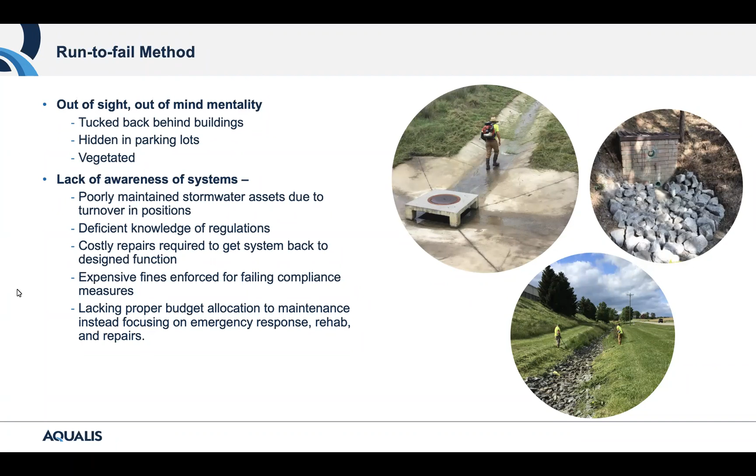So we can't emphasize this enough. With proper preventative maintenance, you can save on costly emergency visits that only treat the issue, not ensure the system is brought back to proper design and function.

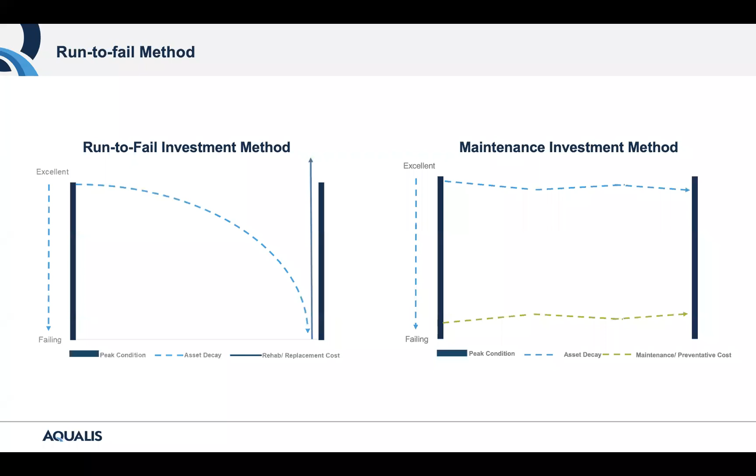So we love to use this graph. As depicted, you can invest in your system through preventative maintenance. Your system is going to retain functionality, mitigate flooding, and manage water quality and quantity as it's intended to. And over the term of the life of your system, preventative maintenance is routinely much lower than the cost to repair and bring a system back to compliance.

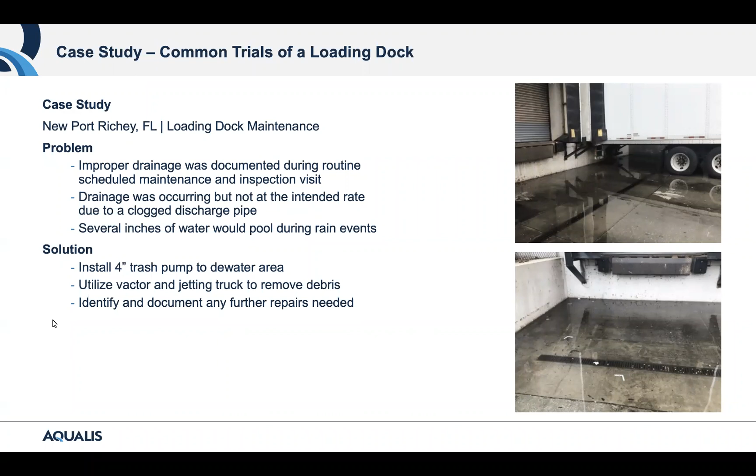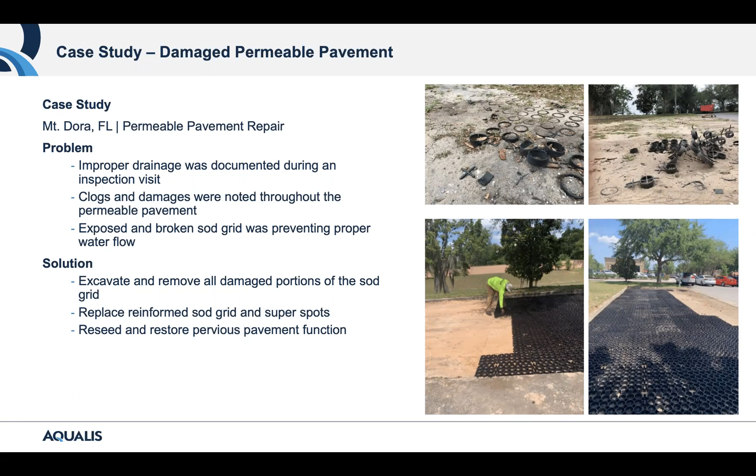So sometimes even with proper maintenance and inspection, the root cause can be out of your hands, right? So it's important to be mindful of stormwater consequences for your property and your neighbors. Spreading education, informing others of how to be good stewards of stormwater management is essential to preventing flooding. So stormwater runoff disregards property lines. So work with your neighbors to ensure all compliance is met, which helps mitigate flooding and impacts water quality for all.